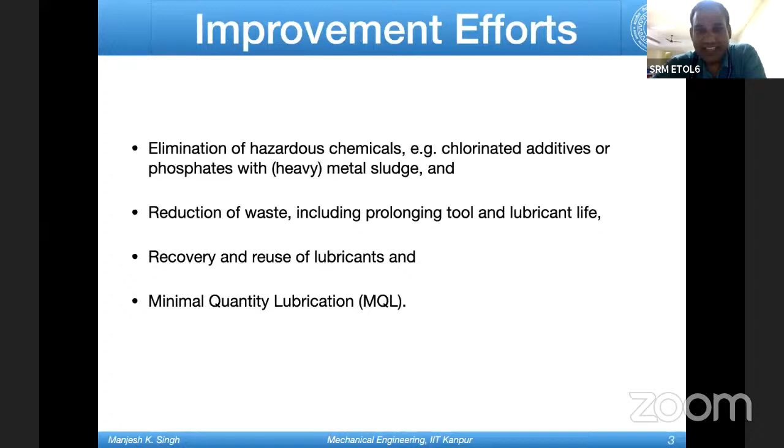If you want to check any video, you can just see. Yeah, it is working, video. I simply don't have video, I normally don't keep videos, but that's fine. It looks fine, no issue, it's working, so I'll stop sharing for now.

So, one thing - how are things? Fine, fine sir. Thank you so much for taking time out of your busy schedule to join us today and to deliver your wonderful talk. So we will start, sir. Yeah, I'll give the brief introduction and we can start.

Good morning everybody. We have our first speaker on day 2 of this 5-day international short-term course on tribology for sustainability. We have Dr. Manjesh Singh with us. It is my honor and privilege to introduce him to all of us. Dr. Manjesh K. Singh joined the Department of Mechanical Engineering, Indian Institute of Technology Kanpur on 16th September 2019, almost a year ago, as an assistant professor. His principal areas of research are tribology and rheology, mostly with polymers.

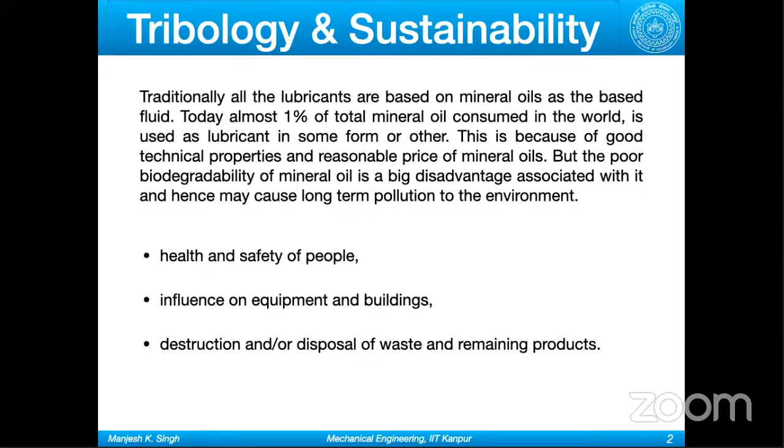So with this, I'll move to the next slide. As I said, the improvement efforts are primarily directed at elimination of dangerous chemicals, like chlorinated additives, phosphates with heavy metals, sludge, and all. Reduction of waste, including prolonging tool and lubricant life, recovery and reuse of lubricants, basically recycling, and then minimal quantity lubrications, where the idea is to put optimum quantity of lubricants required for the lubrication, no more or no extra, which will be disposed to the environment.

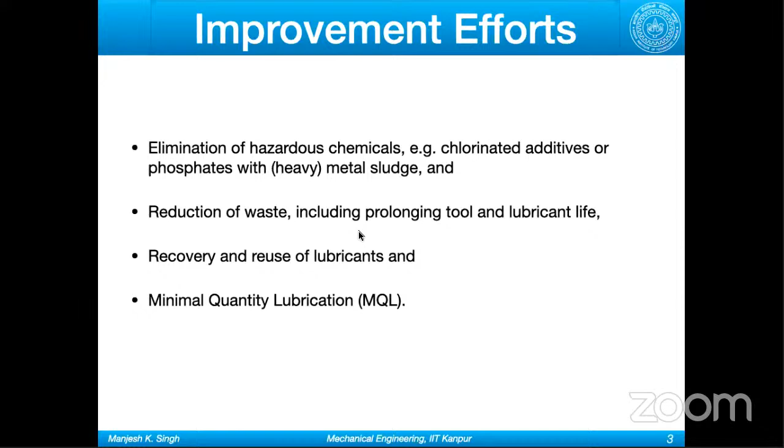And then my topic is aqueous lubricant. I would like to highlight water as a lubricant, and why we don't see water commonly used as lubricant. There are some properties of water which make it potentially a very good candidate for lubrication. It's readily available, non-toxic, environment friendly, and has high heat capacity, which gives it excellent heat transfer properties. At the same time, water has a very low boiling point, and whenever you have friction involved, you have very high heat generation, so the low boiling point of water is a disadvantage.

The biggest disadvantage with water is this low pressure viscosity index. Normally with oil lubrication, as you increase the pressure, the viscosity increases, which gives oil-based lubricants this load carrying capacity, which water doesn't have. If you have water in contact and you apply load, water will simply squeeze out because the viscosity doesn't increase as you increase the pressure.

But still, there are some specific fields where water is used as lubricant. One of the most prominent, which I would like to highlight, is the mining industry, because we want to avoid using oil as much as possible there, since there are very high chances of catching fires. So it's water which is primarily used for lubrication purpose there. I told you the limitations, but water has some attractive properties which we would like to exploit, though water on its own is not good for lubrication.

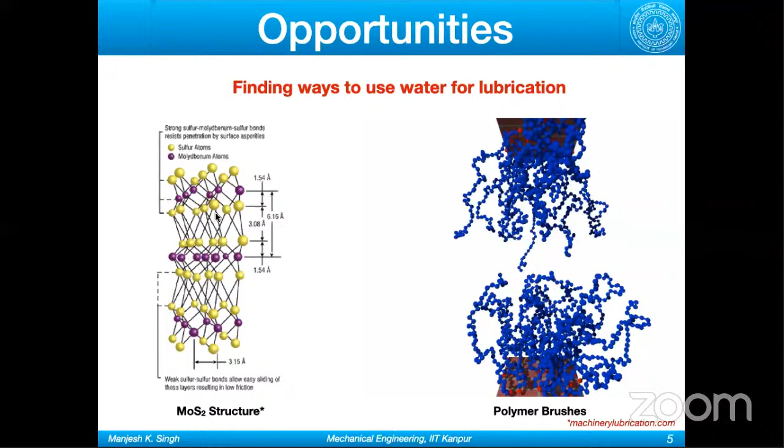All the lubrication in nature in our body is based on polymer brushes, and it's based primarily on this aqueous lubrication. With the help of water and polymer, we have lubrication. Polymer in the body means protein and all, glycoproteins and all. We have lubrication in the body. So I'll talk about these two topics in a bit of detail.

So I'll first start with this nanoparticle-based aqueous lubrication. The talk would have - I'll give, because it's a short-term course, it's not just a technical presentation - a brief introduction to emulsions and emulsifiers.

What are they? Oil in water emulsion, which is normally used in metalworking, and then the objective approach which I undertook during my master's thesis. And then why we want to use nanoparticles, then the experimental details, experiments which I did, the results, and then summary. I'll summarize this part of the talk and outlook.

As I mentioned, I will not have any simulation parts in this presentation. So emulsion and emulsifier, I'll start with this. Introduction - why we want to use this nanoparticle-based aqueous lubrication, or aqueous lubrication.

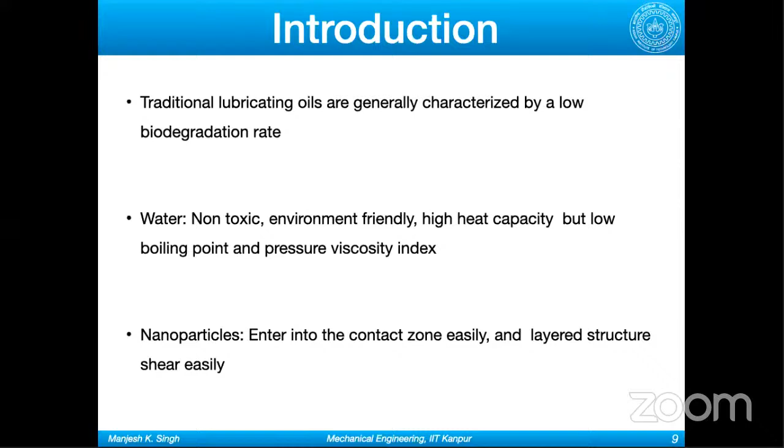As I mentioned before, traditional lubricating oils have a very low biodegradation rate. Water has some advantages which we want to exploit, and nanoparticles, because of their small sizes, can easily get into the contact zone, and because of their layer structure. So we cannot use just any random nanoparticles - it has to be nanoparticles with certain materials which have layered structures, which shear easily and give us low coefficient of friction. So what is emulsion?

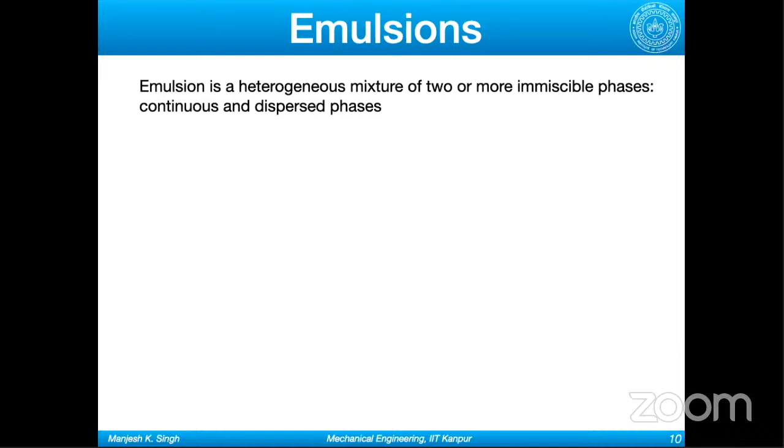Like if you do rolling and all, you'll see mostly this oil in water emulsion is used for lubrication, where roughly close to 90% or more is water, and then less than, I think close to 5%, even less, is oil, and the rest is all water. And I will tell you how it works when it comes to lubrication.

But what I want to do, or what the idea of my master's thesis was, that we wanted to replace this oil with nanoparticles. The water will be as it is there - we wanted to replace the oil with nanoparticles which have layered structures. So basically, we wanted to get rid of any oil in the metalworking lubrication.

So then emulsifier or surfactants - why do we need it? Generally emulsions are very unstable due to difference in the density of the dispersed and continuous phases. So you have water and oil, or nanoparticles and water, which have a density difference. If you use large particles, they will just sediment on the bottom of the surface. If you use very small particles, then because of their high surface area to volume ratio, and van der Waals attractions, they will come together and form clusters. So you will not have a very well dispersed emulsion.

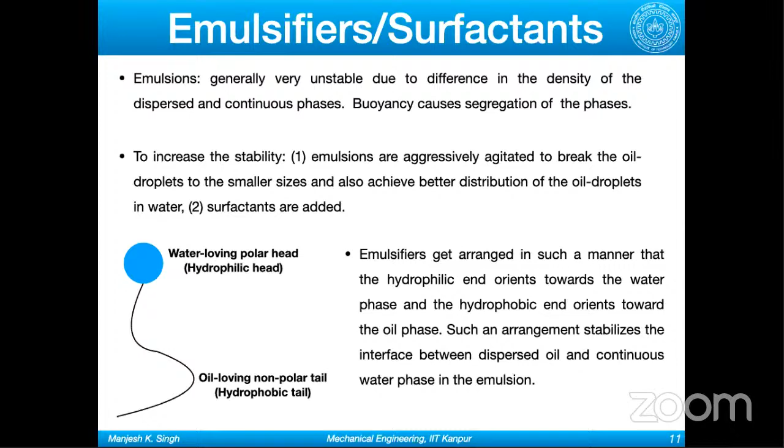So this way your water droplets will be stable in the continuous phase of water. Yes, oil droplets will be stable in continuous phase of water. So how, as I said, I will explain how this oil in water emulsion works.

As this emulsion is dragged into the contact zone, since water has very low pressure viscosity index, the water will simply squeeze out, and finally at the contact it changes from oil in water emulsion to water in oil emulsion, and when you reach the contact, you have only oil.

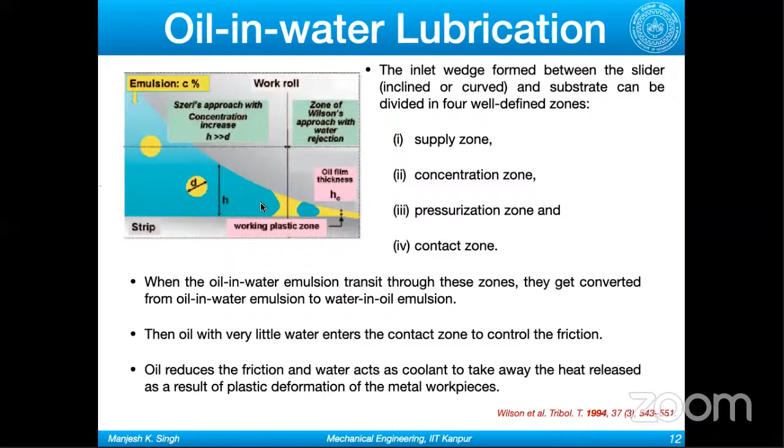So even in this case, it's only the oil which does the lubrication. What water does, because of its high heat capacity, is take away all the heat generated. So the combination works very well: oil takes care of the lubrication part, and water takes care of the coolant part. This is the idea of this oil in water emulsion mechanism.

So what we wanted to do is eliminate use of oil-based lubricant to improve carbon footprint, and achieve these goals by use of nanoparticle-based aqueous lubrication. Water does not provide elastohydrodynamic lubrication, as water has a poor pressure viscosity index, so it cannot support the rolling load. In case of rolling, we suspend inorganic nanoparticles in water to provide load bearing capacity.

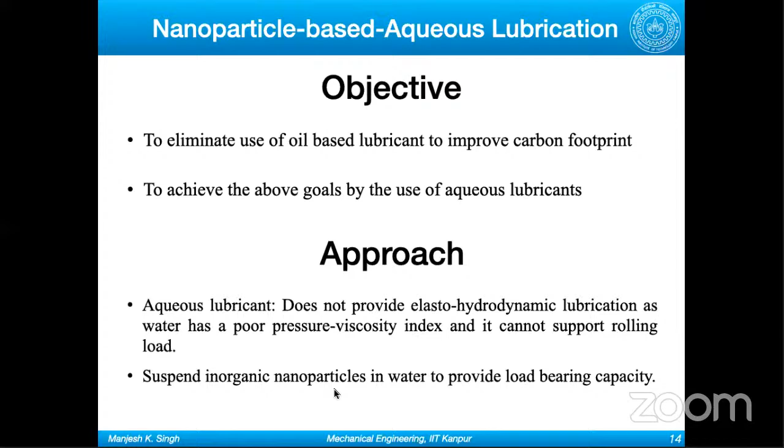So I'll now tell you a bit about nanoparticles. They have several advantages compared to organic molecules, which makes them a potentially good candidate to be used as an additive in the lubricant. Their nanometer size makes it possible for them to move into the contact zone without difficulty, just like oil moves into the contact zone easily.

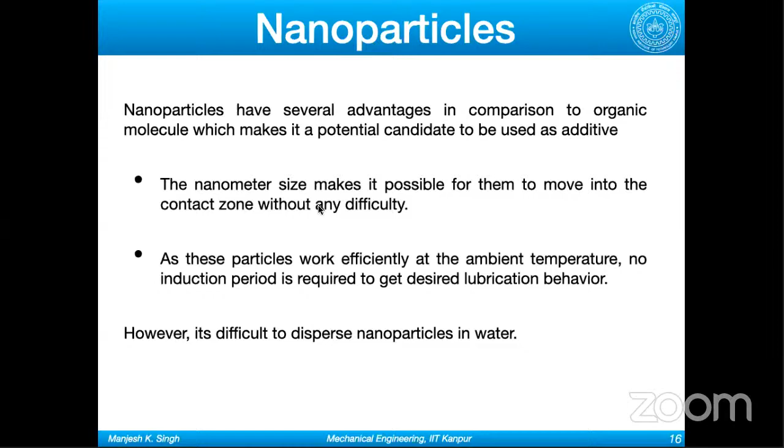The water will simply transport these nanoparticles into the contact zone, as it was doing before with the oil. These nanoparticles, because of their layered structure, can shear easily, which gives lower friction. These are some typical examples of nanoparticles used as lubricant, normally used as solid lubricant.

So all of these, like graphene, MoS2, WS2, or hBN nanosheets, have a layered structure. Within the layer, they have covalent bonds, and between the layers, they have weak van der Waals interactions. When you apply normal load, because of the covalent bonds, they can support the normal load, but because the interlayer binding is very weak due to van der Waals interaction, when you apply shear, they easily shear. That's why you have very low friction.

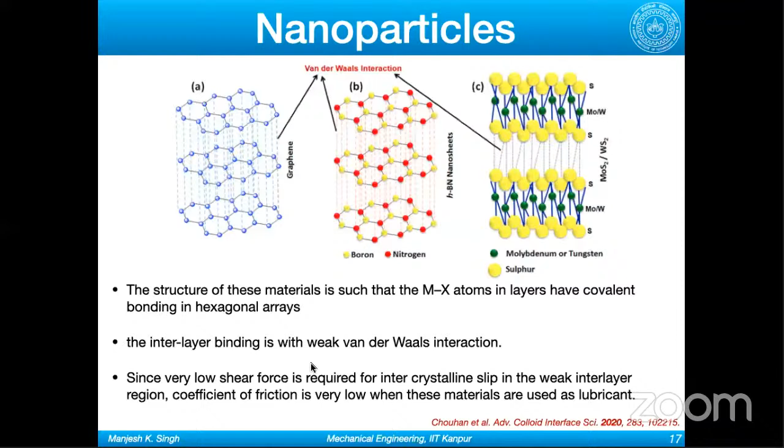So the idea was that we just replace oil with these nanoparticles which can shear easily, and they will give us low friction, or low coefficient of friction, so to say.

For the experiments, I tried different nanoparticles: MoS2, Kaolin, and Nanoclay nanoparticles. The surfactant I used was sodium dodecyl sulfate, more commonly known as SDS. These are the details of the concentration of particles used.

To prepare the mixture, we sonicated it for 2 minutes using ultrasonic. I didn't mix all the particles together; in one case just particle plus water, in another case particle plus water plus surfactant, then we ultrasonicated for two minutes. Then we did the DLS experiment to get the particle size and zeta potential.

Thereafter, we did ball on disk tribometer experiments at various speeds and loads for different nanoparticles suspended in water. The material used in the experiment was bearing steel, EN31, of diameter 6 mm, used as the ball in the ball on disk tribometer experiments. The disc was stainless steel, SS304, which was used as a substrate for the experiment.

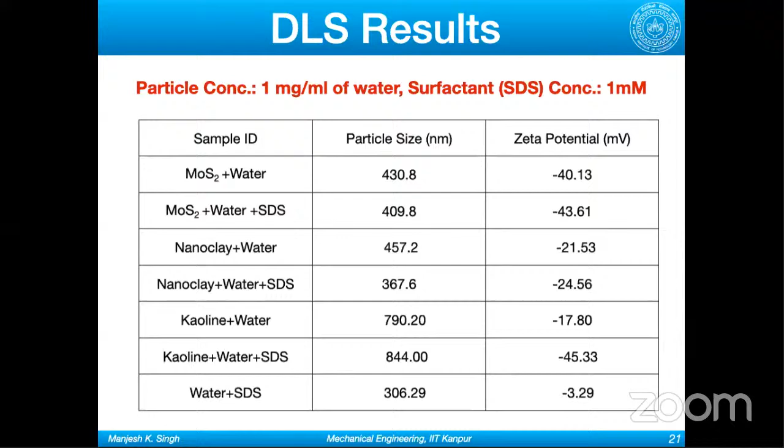We also tried just water plus SDS. I'll tell you the reason later why we did this particular experiment, so I'll not focus on it now. If you are interested, you can ask me later about this part.

So I'll just go into the tribological results, or friction results. First we started with the dry contact. On the left side you always have friction coefficient against speed at a constant load of 800 megapascal. When I say 800 megapascal, I've calculated this contact, the Hertzian contact pressure, because I know the materials in contact and the geometry.

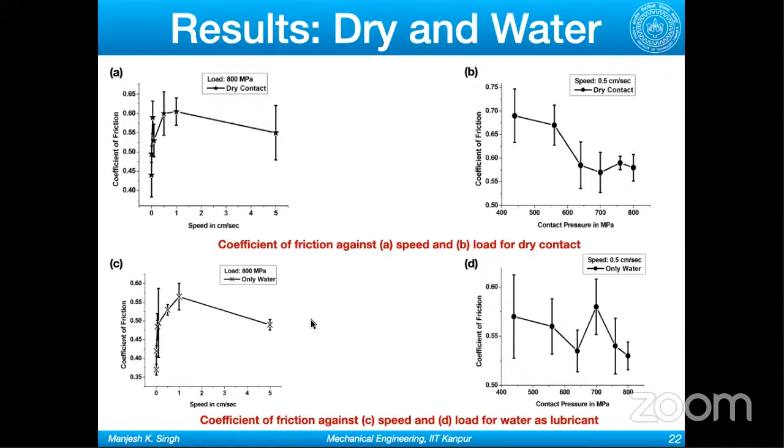So whenever I say the load in this part of the talk, it's basically Hertzian contact pressure. In dry contact, both against speed and against load at constant speed, we see a pretty high friction value, which is expected. When I did it in just pure water, we also get similar friction. As we know, water cannot help reduce friction because it cannot support normal load - it will just squeeze out, and you again have metal contact, or alloy contact, or hard surface contact.

When we add this surfactant, we see higher friction. But when we plot it against contact pressure, or against load, the friction values are close, though the trend shows a switch. So what we can basically say is that when we add just nanoparticles to water, our friction already goes down to a very low value, similar to what we got with oil lubrication. So we are getting rid of oil and still getting the same coefficient of friction.

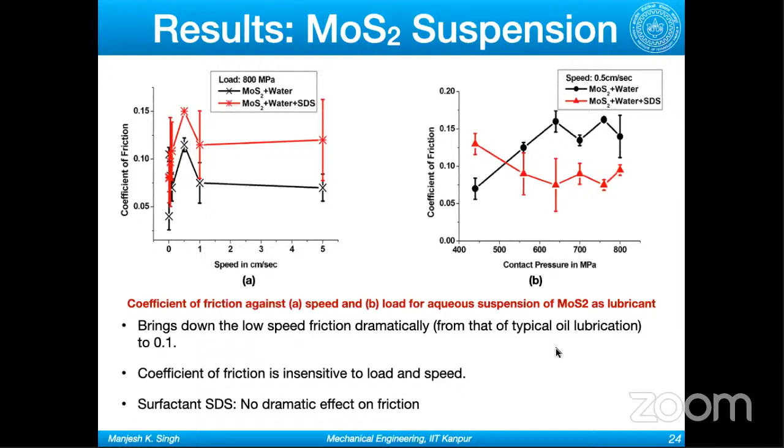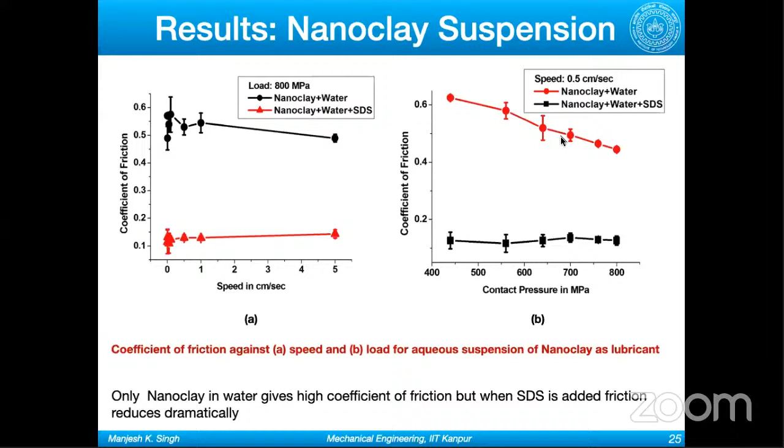That made us interested in the effect of SDS, or sodium dodecyl sulfate - what does it do? To check that, we did one experiment with just sodium dodecyl sulfate and water, surfactant and water, and we also saw very low friction. I'll go back to these results again later. So what we can say is in the case of MoS2 plus water only, we are getting low friction.

But with nanoclay plus water, we were not getting good, low friction - we were getting rather high friction. But when we added SDS plus water, we got low friction. So it could be that nanoclay is doing nothing - it's just the SDS which is forming a monolayer on the surface, and it is reducing friction in the case of the nanoclay plus SDS mixture, or suspension, in water.

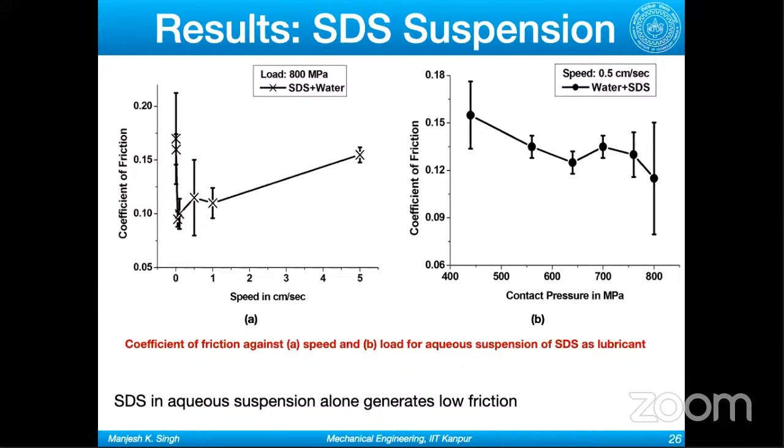But in case of MoS2, we got low friction without the surfactant. So with this, I'll compare the results. What we can see is that in all the cases, MoS2 plus water without any surfactant gives us low friction, even lower than water, even lower than oil. So it is a good candidate.

The other two candidates, nanoclay and kaolin, didn't perform as good or as expected. But when we added the SDS, the performance improved there too, but we are not sure exactly if it is because of kaolin or nanoclay or just because of SDS. We can certainly conclude that MoS2 plus water gives us coefficient of friction comparable or even lower than

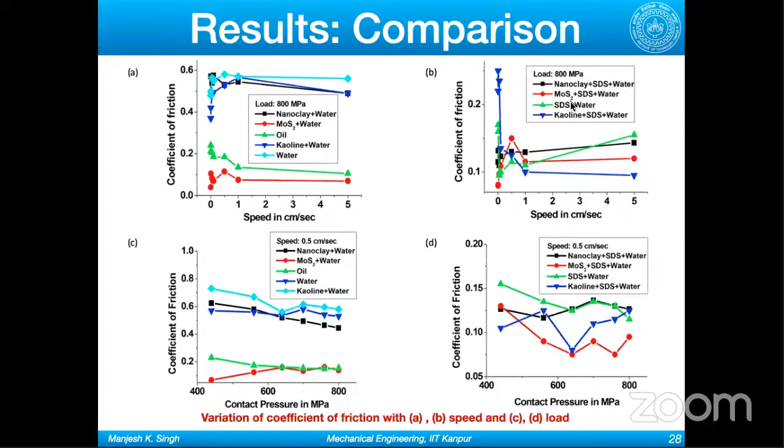with just oil for lubrication. So this could be one possibility. I'm not saying that you should right away use it, but what I'm saying is that we need to probe it further. It seems to be a good candidate to replace oil in water emulsions for lubrication in metalworking.

To summarize, the nanoparticle-based aqueous lubricants can bear high contact pressure of all the particles studied. MoS2-based aqueous lubrication gives the best results, and SDS in aqueous suspension alone also generates low friction. The reason for this behavior of SDS is not understood and requires further investigation.

This work I did in 2010-11 during my master's, and after that I could never go back, because in my PhD and postdoc I was working with different things. So if you guys are interested, you are most welcome to look into these things in detail.

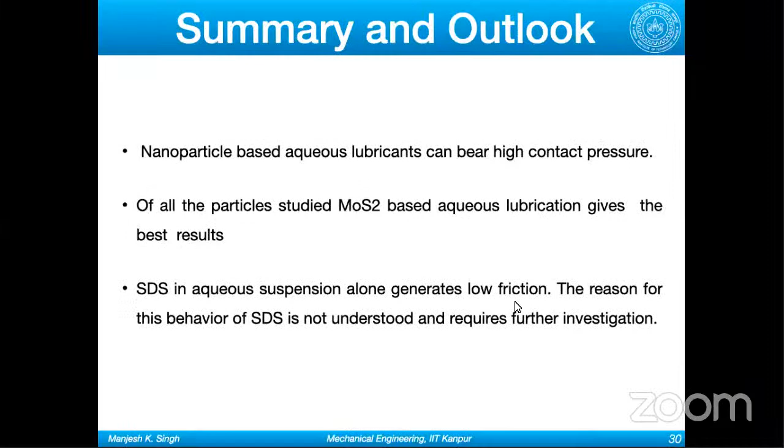With this, I'll move to the next part of my talk, which is polymer-brush-based lubrication. Here again, I will talk only about my experimental work, no simulation works. I'll take you to the introduction, what is polymer brush.

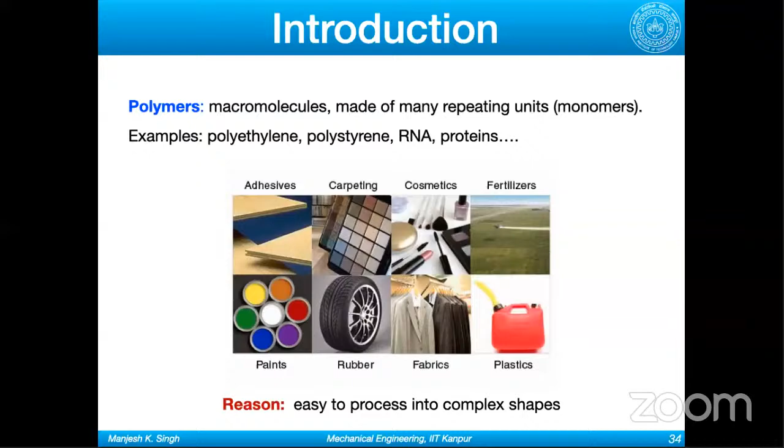As I said, we see it all around us. The reason is that polymers are very easy to process into complex shapes, and that's why it's being exploited too much as well, and it is becoming harmful, to our disadvantage, and we're trying to limit its use in our day-to-day life as much as possible.

And then if you are in a good solvent, what do you mean by good solvent? Good solvent for a polymer is a solvent which the polymer likes, so it would like itself to be surrounded by this solvent. That's why it opens up and is surrounded by the solvent, so the contact surface area with the solvent is more.

But when you have a poor solvent, that means the polymer doesn't like the solvent, or rather you can say hate—maybe hate is too strong a word—it will avoid any contact with the solvent as much as possible. So it will collapse in the form of a sphere or a globule to minimize its contact with the solvent. Whenever you say a poor solvent, you'll basically see the polymers collapse.

And how do you see, physically, if you want to check whether a solvent is a good solvent or bad solvent for a polymer? You just add the polymer to the solvent. If you can see through, if the mixture is still transparent, that means it's a good solvent because the polymer is happily opened up.

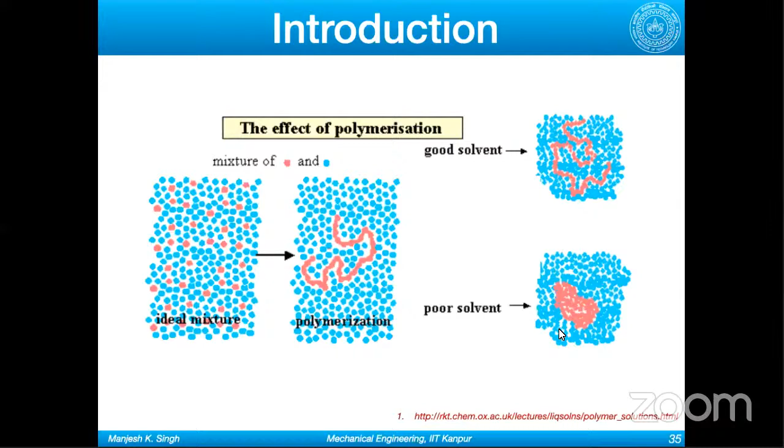But if it's a bad solvent, the polymers will collapse and you will see turbidity, so the mixture will not be transparent. So at once you can say that it's a poor solvent for that particular polymer. Why I told you this, because I will be using this term good solvent or poor solvent in my talk today.

So what is polymer brushes? If you have polymers in a good solvent and you graft or fix one end such that the distance between two neighboring grafting sites is much higher than the radius of gyration of the individual chain, they'll form a mushroom-like structure. If you move them closer, so the distance is of the order of the radius of gyration, they'll be like semi-stretched. If you bring them further closer, so the distance between two neighboring sites is much lower than the radius of gyration, they'll stretch out to form a brush-like structure because of entropic and excluded volume effects.

If you repeat the same sequence in a poor solvent, when they are far apart, they will form a pancake-like structure. If you bring them closer, they will form kind of a cluster. And if you bring them further closer, they'll form a homogeneous layer on the surface. They will not stretch out in a poor or bad solvent to form a brush-like structure.

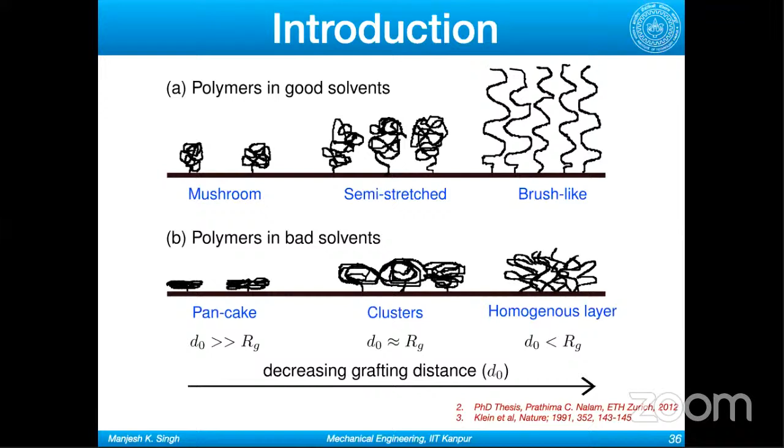So there are primarily two methods to prepare polymer brushes. One is grafting-to, where you have polymer chains already in a solution. You pour it on the surface, like we used to do on the silica surface, and because of electrostatic interaction, it will get attached from the functionalized group to the surface and form a brush-like structure.

The advantage here is the self-healing effect. Suppose you are rubbing your polymer-grafted surface against something, and some polymer chains wear out. If you prepared your polymer brush using the grafting-to approach, there are other polymers in the solution freely roaming around, and they will come and replace it. So it has a self-healing effect. But the limitation is that you cannot achieve a very high grafting density, because if polymer chains are already occupying a spot, they will not let other polymer chains enter in between.

The other approach is grafting-from, where you first attach the initiator to the surface and then you grow polymer chains out of it. Here you get very high grafting density, but you don't have the self-healing effect. So both approaches have their own advantages.

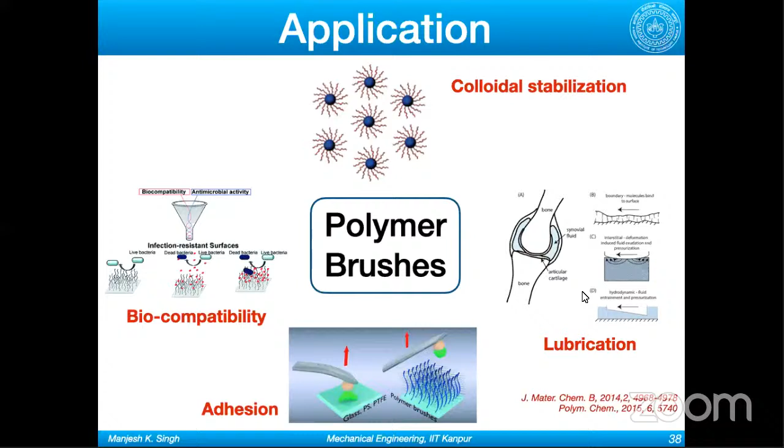The other part where I will focus, or my work is, as I was saying, all the lubrication in nature is based on this polymer brush in our joints, in all the joints, or in any living thing. This lubrication is basically based on polymer brushes. Just to give you a simple example, you have these surfaces and glycoproteins attached to the surface, and as I said, they form a polymer brush-like structure. And then you have this synovium or synovial fluid, as they say. I am not very used to these biological terms.

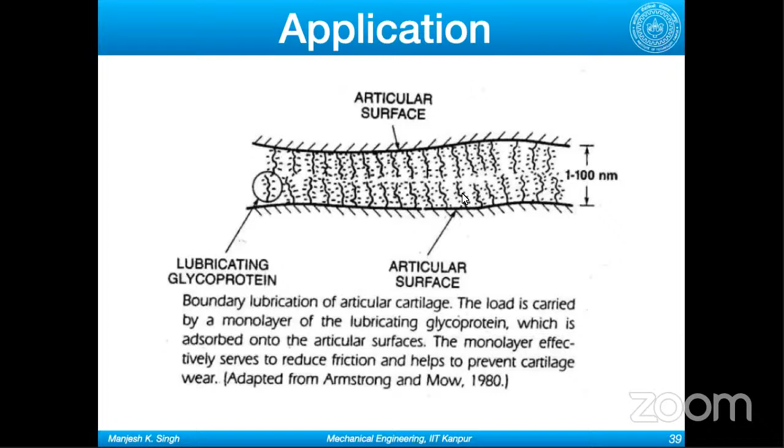So synovial fluid, which is in between, is more like water or any solvent that the polymer, in this case glycoprotein, likes, will be in between. These polymers will take care of load carrying capacity, and this solvent in between, because of its low viscosity, will give you lower friction.

What happens is that your polymer chains, grafted on the surface, because of excluded volume effect or entropic reasons, don't want to interdigitate.

So what exactly happens is that polymer brushes, because of strong interchain repulsive force, prevent interdigitation, and a thin fluid film supports the normal load between opposing brushes or brush and counter surface. This thin film of fluid in between takes care of lubrication, or it assists in reducing the friction at the interface.

So if you have a hydrophilic polymer for which water is a good solvent, and you use water with this polymer, the polymer will take care of the load carrying capacity, and the water, because of its very low viscosity, will reduce the friction. If you have a brush against brush system, the friction will be too low to measure with most of the experimental tools available today.

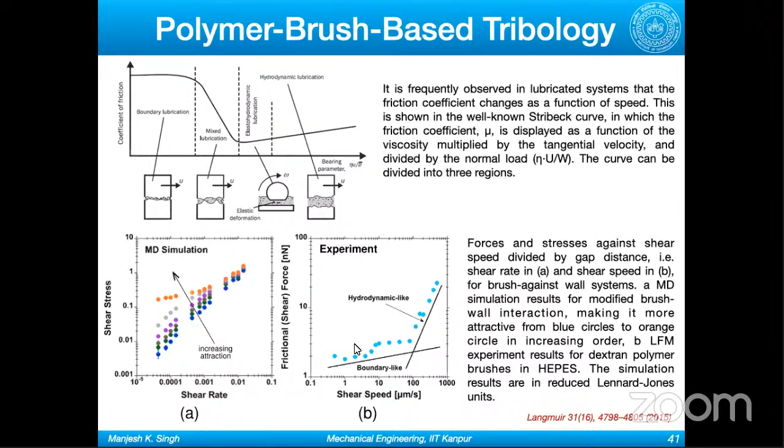But if you look at this polymer brush-based lubrication, these are my simulation results and these are experimental results from one of my colleagues. You see a hydrodynamic lubrication regime, a mixed lubrication regime, and a boundary or boundary-like regime, but you don't have any mixed lubrication in between—you just go from boundary to hydrodynamic directly, which makes it very interesting. This is just to give you information; if you are interested, you can read more about it.

So I will now show you the effect of cross-linking. What happens if you increase the cross-linking on the tribological behavior of polymer brushes? So what do I mean by cross-linking?

As I told you, we grow polymers out of the surface to form polymer brushes. We can also cross-link this chain. The reason people normally cross-link the polymers is to increase the modulus. Normally the polymer and solvent alone will have very low modulus, so they will wear off easily. But if you do the cross-linking, you can improve the modulus or stiffness, and so reduce the wear.

So you have to have a combination, kind of brush and gel, and you have to have optimum cross-linking so that you have low friction and low wear as well, because if you have a lot of cross-linking, as we will see, the friction will go up.

There are two methods to create these cross-linked polymer brushes, also known as polymer gels. One is the initiator modified substrate, or in situ method, where while you're growing the polymer chains out of the initiator, you cross-link them. The other is post-processing, or ex situ, where you first grow the polymer chains with functionalized monomers or ends, which after growing the polymer brushes you functionalize to react and form the polymer gels.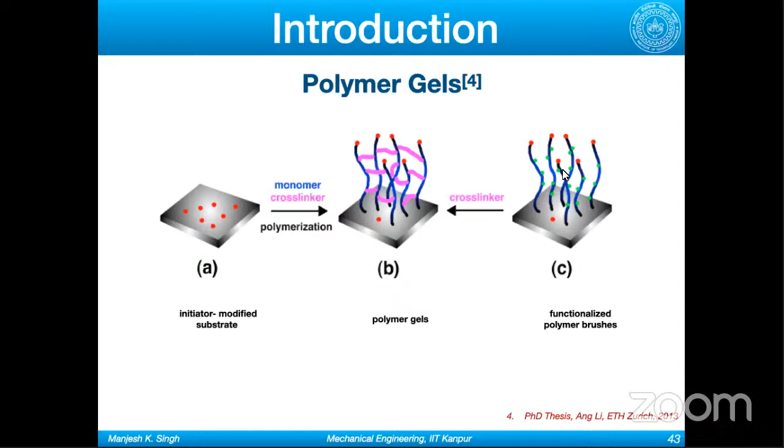I did the testing with AFM and the simulations, but I am not an expert to prepare these polymer brushes or gels, because I'm not a chemist and not good with chemistry. So what was the objective of this study?

To model polymer brushes using coarse-grained molecular dynamics technique, to characterize the tribological behavior of various polymer brush systems using colloidal probe-based lateral force microscopy, and to elucidate the molecular design of brush systems. If you want a certain kind of lubrication, what parameters you need to control and how much. So basically it gives you a design rule for designing polymer brushes with the optimum or required lubrication properties, using a feedback loop between experiments and simulation.

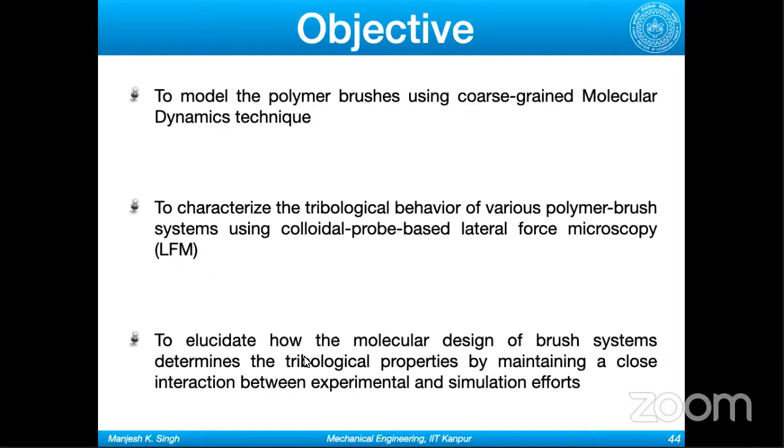Here I will show you only the experimental part of my work. So the material first: we had PGMA, polyglycidyl methacrylate brushes and gels. The solvent we used was DMF, which is a good solvent for PGMA brushes and gels.

So as I was saying, we use AFM-based colloidal probe lateral force microscopy. Normally we use AFM to get the topography of the surface by tapping mode or other modes, because when you do the rastering of the surface, because of the surface profile, your cantilever will move up and down, and you can get the profile of the surface.

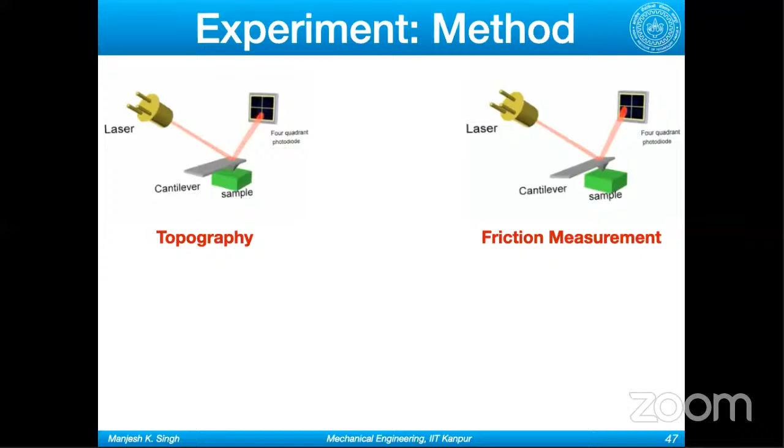But you can also measure friction using AFM. What you do is you have four diode quadrants. So when you apply lateral motion to your cantilever, it will face the lateral force, so it will twist and move on the diode in the XY direction. And if you calibrate your cantilever in the lateral direction for lateral stiffness and sensitivity, you can measure the lateral force or friction force.

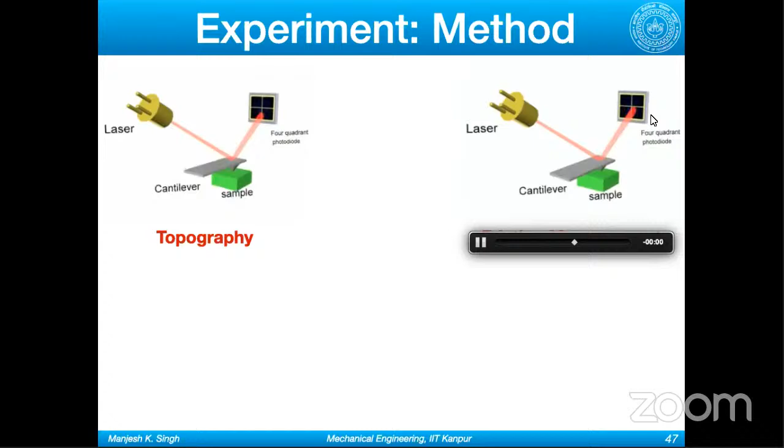You know what force you're applying because you know what voltage you applied. So you know the normal force, you know the friction force, and you can get the coefficient of friction from there. So as I said, we use colloidal probe lateral force microscopy.

I didn't use a sharp tip cantilever, because we are using polymers in our experiment. If you go with a very sharp tip of silicon carbide or something, it will simply scratch off your polymers, so you will not get to study what you want to see.

So what we do is buy tipless cantilevers. We attach a colloidal sphere, silica colloidal spheres, on this tipless cantilever. Now we don't have a very sharp tip, and we have a well-defined geometry—a sphere. We have a higher contact area because we are using a sphere, so the contact pressure goes down.

This also helps us, if you want to deduce the contact pressure or contact mechanics, you can do it because you have a well-controlled geometry, or a geometry which you know.

In AFM, normally you have a trace and a retrace curve, and you take the average of these two curves to get the friction force. So this is the trace curve, this is the retrace curve. You do this minus this, divided by two—you can take the modulus value of each, or just subtract one from the other and divide by two. You will have a friction force. You have applied the normal force or voltage, you know the sensitivity and stiffness, so you know the normal force and the friction force, so you can get the coefficient of friction.

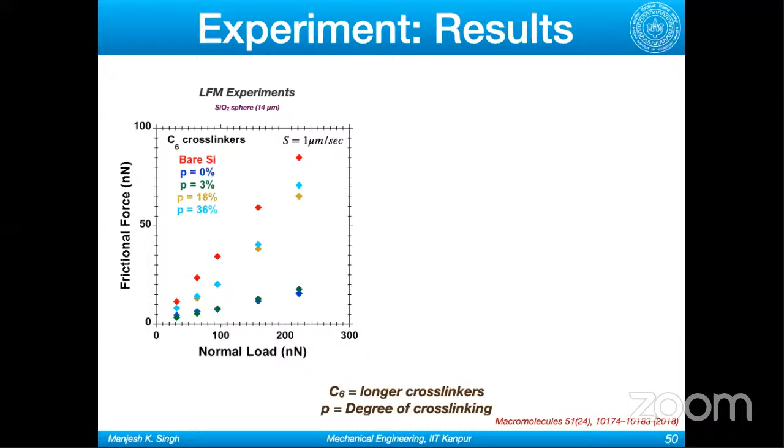We repeated the same experiment for C6, the longer cross-linkers, and we have a similar trend here as well. I'll just quickly move to the coefficient of friction part.

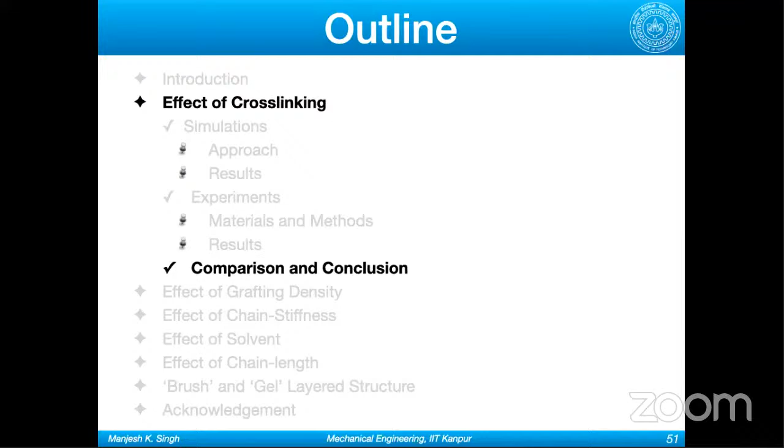So here I've shown only the simulation results - I haven't told you the simulation details, what all I did there. What we can clearly tell from this is that as you increase the degree of cross-linking, your coefficient of friction goes up, both in simulation and experiments. But as you increase the length of the cross-linker, your coefficient of friction goes down.

In simulation, this was very clear and consistent. But in experiments, the effect of cross-linker length at lower degrees of cross-linking is not very clear. Don't compare these coefficient of friction numbers on both sides, because the idea was not a quantitative comparison - I was doing the simulation in reduced units, so it wasn't all-atom simulation, more on the physics side. We're basically comparing the qualitative trends seen in simulation and experiments.

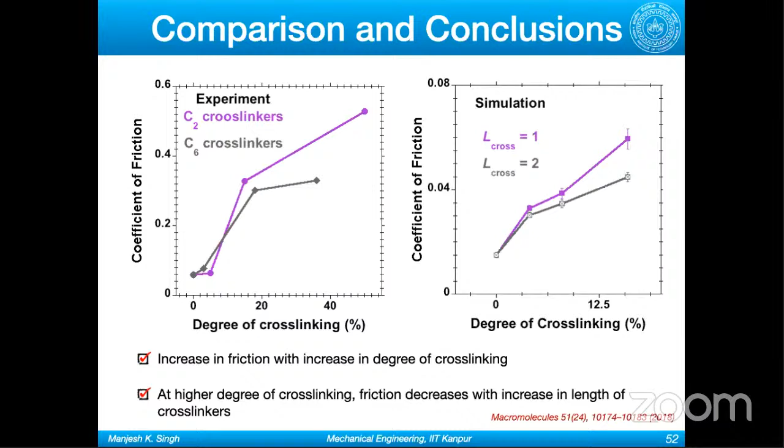With this, I'll move to the effect of grafting density - I think my time is also closing. As I said, there are different parameters which affect polymer-brush-based lubrication.

If you have very low grafting density, there are fewer polymers to support the normal load, so the solvent will squeeze out. If you have high grafting density, they can support the normal load, and the solvent in between can help reduce friction. So as expected, if you increase the grafting density, the coefficient of friction will gradually go down.

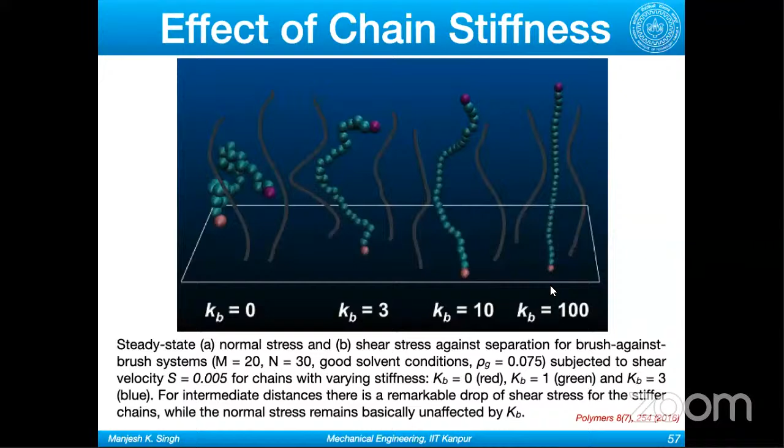Then we move to the effect of chain stiffness. What do I mean by chain stiffness? In simulations, we take KB as the bending rigidity or bending coefficient. As you increase the bending coefficient, the polymer chains become more and more stiff - that's what I mean by chain stiffness.

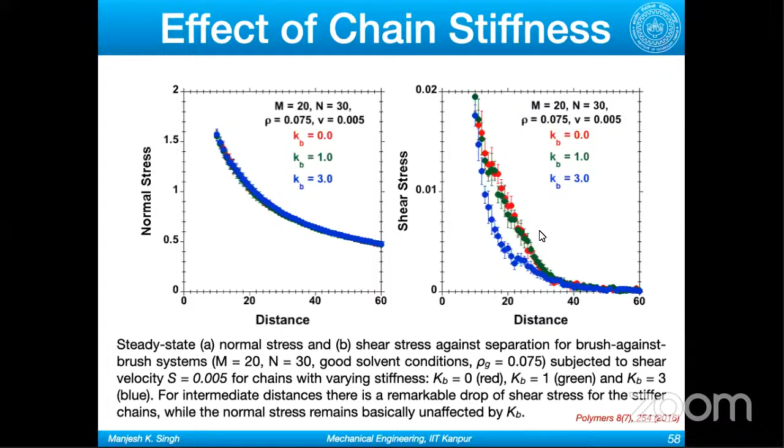So here also we saw that as we increase the chain stiffness, there's no effect on the normal stress, but the shear stress is decreasing as we increase the stiffness. Basically what happens is that as you increase the chain stiffness, your friction goes down.

Then effect of solvent. Polymers have this good solvent, bad solvent behavior - very interesting material. They also have something called co-solvency. What is co-solvency? Suppose there are two solvents which are individually a bad solvent for the polymer. But when you mix them at a certain mixing ratio, they behave as if together they are a good solvent. So we call it co-solvency.

Then there's co-non-solvency behavior as well, where two good solvents for the polymer, individually good, but when mixed together at a certain ratio, behave as if they're a bad solvent. The polymer will collapse and will not form a brush-like structure. So we can exploit this to design smart lubricants.

So what do I mean by collapse or swollen? The top one is what we call co-solvency. On both sides you have poor solvent. This curve tells you the swelling or thickness of polymer brushes - with both sides pure bad solvent, you have a collapsed state, but as you mix them at a certain ratio, they swell and form a brush-like structure.

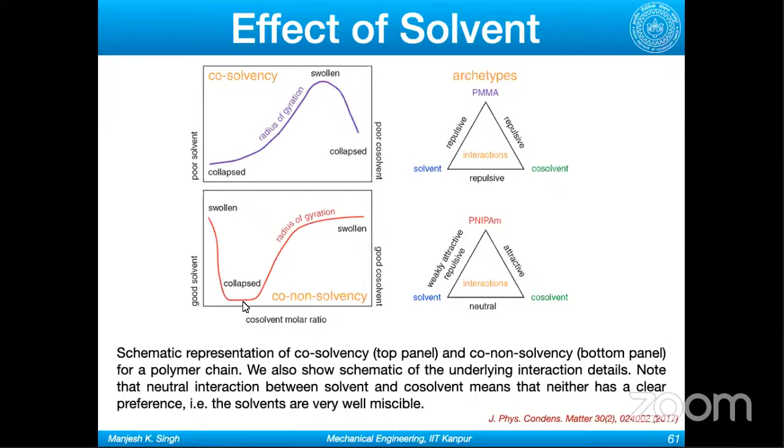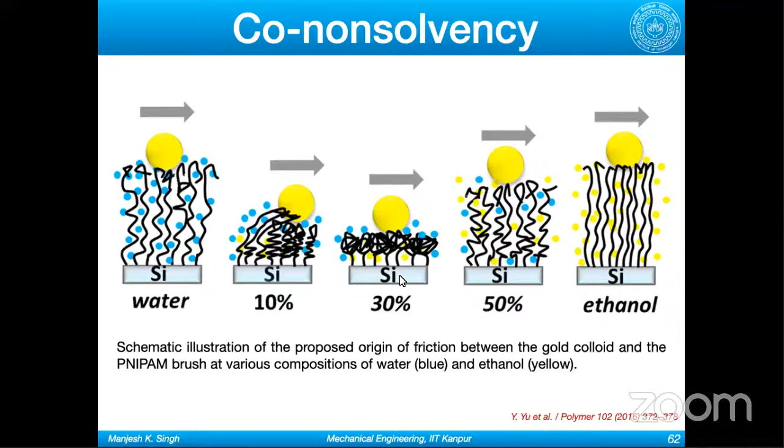People have studied this - you can have a water-ethanol mixture, like for the PNIPAM. In pure water, polymers are stretched out forming brush-like structure. In pure ethanol also they form brush-like structure, so you have low friction. But at 30% mixture, they're in a collapsed state, so you'll have higher friction, which you can see from this force and separation curve. At 30%, the trace and retrace curve gap is very high, indicating high friction force. But in pure water and pure ethanol, this trace-retrace curve is quite close, so you have low friction.

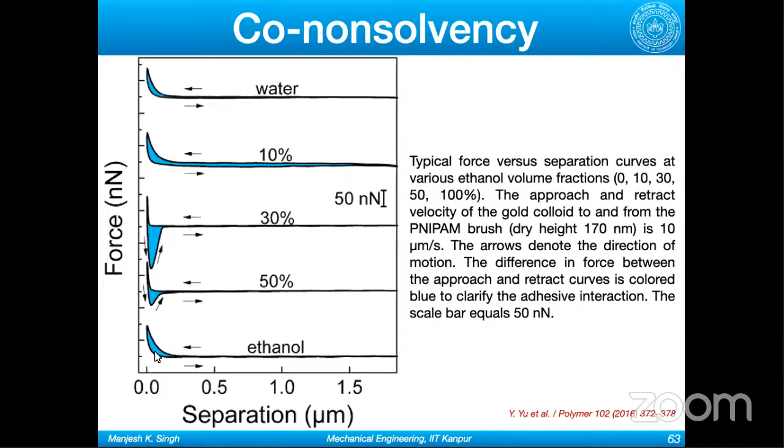With this, I'll move to effect of chain length, which is not very clear. These are my experiments - bare silicon gives very high friction. As soon as you graft polymer chains on the surfaces, the friction goes down. But there are two curves - in this plot on the left side you cannot see it, but on the right side you can see it when I zoom in.

We don't have any clear understanding of what happens with the length - initially, chain length of polymer chains, not crosslinkers, since we don't have crosslinkers there. With the length of polymer chains, initially we see lower chain length gives higher friction, then the higher one gives lower friction. This is something I don't understand, and nobody understands - it hasn't been studied theoretically yet. So we don't know this part.

We repeated this experiment with another colloidal probe of polyethylene. Still, we don't have consistent results. So what I would like to say is that the effect of chain length is still not understood. If you're interested, you can research in this direction - you can have a project or work in this direction.

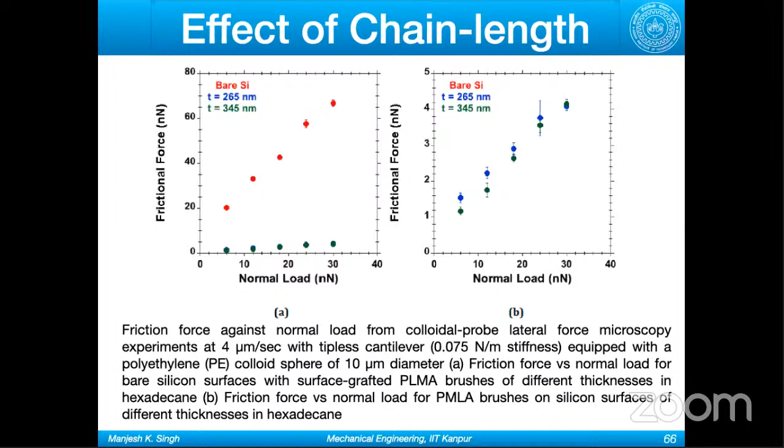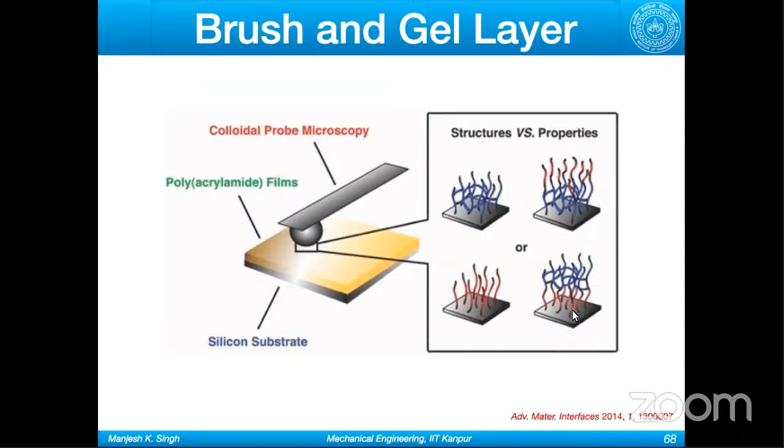It's an open problem. Then there are brush and gel structures. As I was saying, gels are stiffer with higher modulus, so they give lower wear, but polymer brushes give lower friction. So you can have the best of both worlds - gels on the bottom and brushes on top. You will have lesser wear, and because the top layer has brushes, you have lower friction. These are my simulation results again.

I'm sorry, I have to move quickly since my time is closing. In short, if you have brush on top of gel, it will give lower friction and perhaps improve wear behavior as well, though I have not studied the wear properties. With this, I'll summarize that the tribological behavior of polymer brush can be tuned by controlling different parameters.

It can be concluded that thickness of polymer brushes is the most important factor in deciding frictional behavior. Polymer brushes can be designed to achieve specific tribological properties for application in biotribology, mostly in implants where we use this kind of lubrication, or in contact lenses. Contact lens is the perfect example of polymer gel-based lubrication—your contact lens is nothing but a polymer gel.

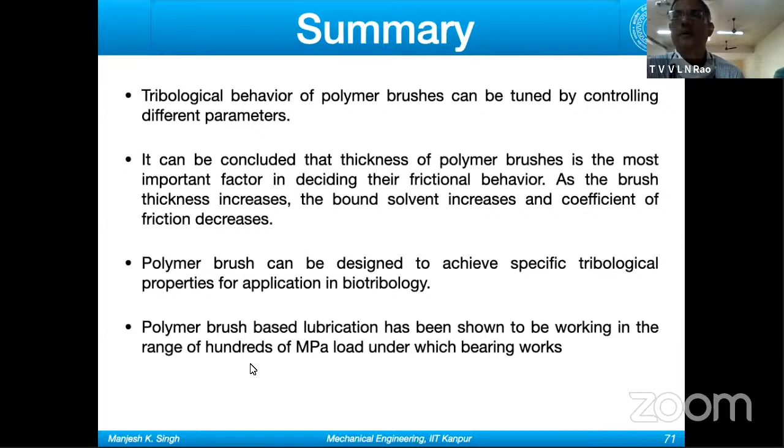Polymer-based lubrication has been shown to work in the range of hundreds of megapascals. So people are studying if we can use this kind of lubrication, with water and a hydrophilic polymer, in metalworking and similar applications, so we can get rid of any oil in our system.

Synthesizing stratified layers of brush-gel or gel-brush structure by controlling cross-linking can lead to specific mechanical and tribological behavior. I'm sorry for overshooting my time.

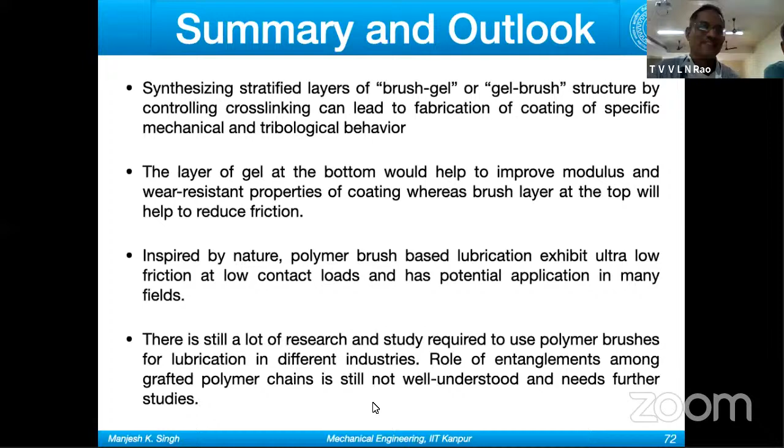There's still a lot of research required to use polymer brushes for lubrication in different industries. The role of entanglements among grafted polymer chains is still not well understood and needs further study. This is something I'm planning to work on now with IIT Kanpur.

With this I'll summarize. If you're interested in the second part of the talk in more detail, you can refer to this book, where our Professor Katiyar is one of the editors. I have a chapter there on polymer-brush-based tribology, you can have a look there. With this, I'll thank you all, and if you have any questions, I'm happy to answer.

Anybody? Thank you, sir. Okay. Thank you, Manjesh. Yeah, just a minute. We have several questions.

Okay, so if you can ask me, I'll try to answer. One question asked by Pawan Soni: he wants to ask about how, as normal load increases, coefficient of friction should increase, but here it is reducing. In which case? In the first part of your presentation, you showed that when increasing the load, coefficient of friction reduces, but he thinks it should go the other way—when increasing the load, coefficient of friction should increase. What is the basic reason for this decrease? Why do you think increasing load will always lead to an increase in friction? I'll tell you why.

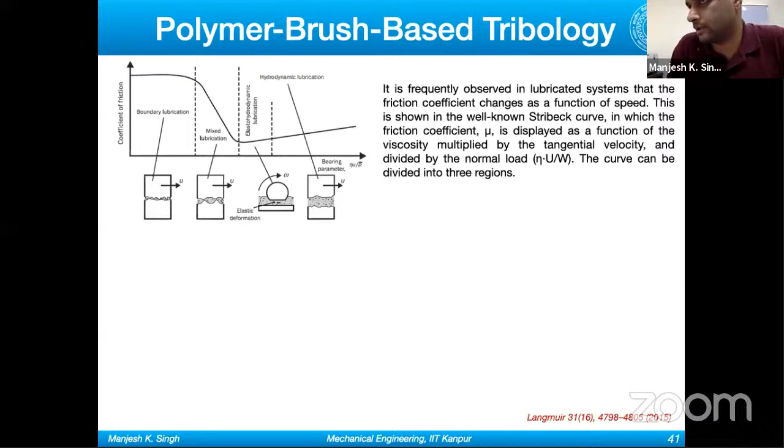My question is, can we apply polymer brush lubrication to surfaces which facilitate chip flow in machining, like flutes or rake surfaces? No, as I said, polymer brush-based lubrication has mostly been used for soft surface lubrication, like in our body. In the group where I did my PhD, Professor Spencer's group, there was one attempt where somebody tried it on a steel surface, but she was not very successful. However, there are other studies, as I mentioned towards my conclusion, where people have reached hundreds of megapascals of load, like 600 or 800 megapascals, the kind of load you have in metal working or chip cutting. So yes, it can be used, but it's still not there. I don't know of anywhere people are using it currently. It's still mostly used for soft surface lubrication, but it's true that people are studying it.

Last question, from Manjesh: Srinivas again asked whether water and MoS2 will mix to form a stable emulsion without addition of SDS. That's what we saw. I don't know exactly how stable it is, but from the zeta potential it was looking quite stable. The numbers were close with or without SDS, but in terms of friction, it was much better without SDS.

So that's from my study. My study was only for 1 year, so it can be. I think without addition of SDS, it will also maybe be stable for 24 hours, 48 hours, like that, but maybe not for 1 month.

I have used only one particular surfactant because of limitation of time, and I had another FEM simulation to take care of during my master thesis. Half of the part was FEM simulation of the cold rolling process, but there are other surfactants like CTAB and others. We studied only one particular surfactant, so we can explore other surfactants and see how they affect the friction behavior. In my study, I focused on only one surfactant.

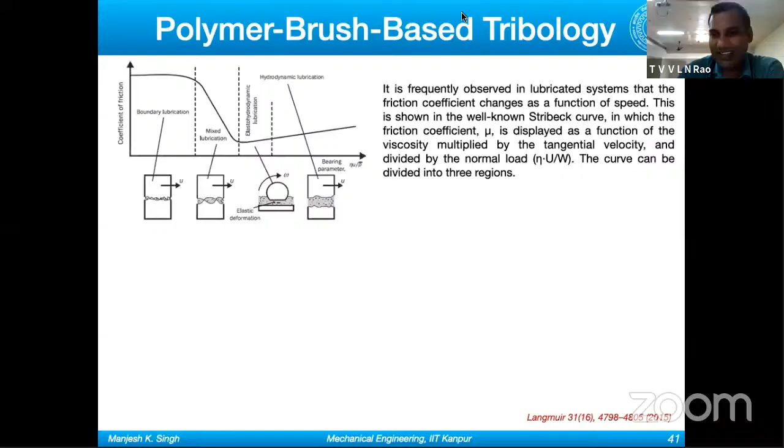Okay, thank you very much, Manjesh, for again such a nice presentation. Everybody appreciated your presentation, it was good. The next speaker is also waiting, next talk from Indonesia. If you are free, please join that talk also. I will try, but I have a meeting to catch up, so I'll just rush out. Okay, okay, nice, thanks a lot. Okay, thank you.

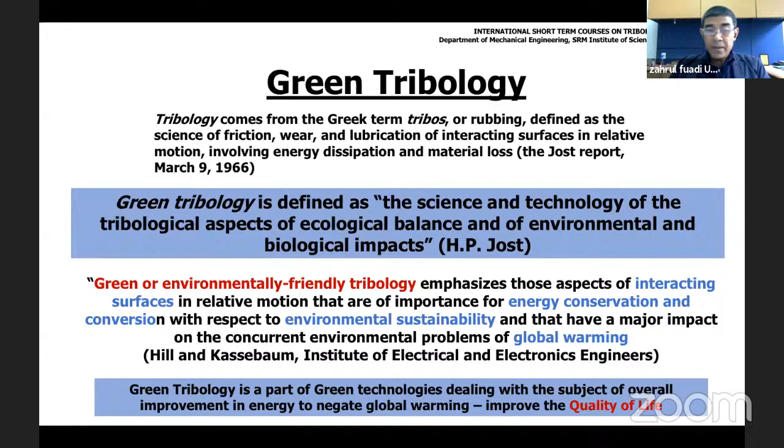To achieve tribological research that improves energy efficiency, we should achieve reduction of material and energy loss due to wear, reduction of energy loss due to friction, and conservation of energy and non-renewable resources by extending the life cycle of components, and reduction or elimination of lubricants through proper selection of low friction mating surfaces. There are three steps to identify typical tribology energy sinks in industry: reduction of tribological losses in major sinks such as utilities and transportation, and exploitation of the energy conservation potential of new surface modification.

Let's talk about application. We have gas fuel cars, and now with technological development, we have hybrid cars, which are fueled by gas and electricity. And then we have Tesla cars, which fully use electricity. So we have some energy conservation here.

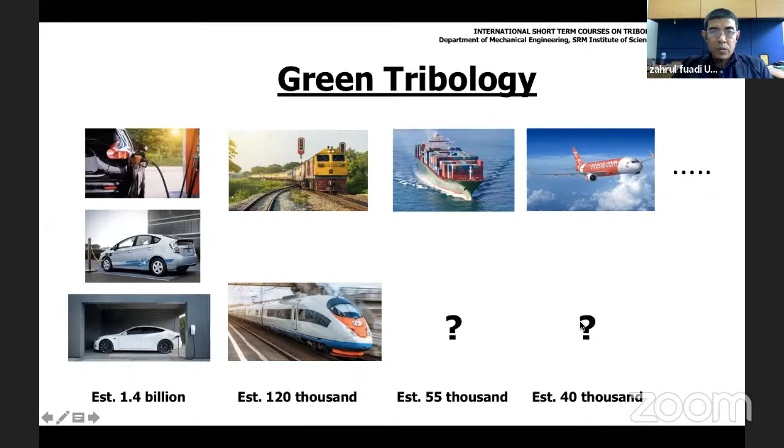In the future, we have to think about producing more electricity from renewable resources, so that the electricity we use for electric cars, electric trains, or other applications does not come from burning fossil fuels. Then we have a sustainable world, energy reduction, and a better environment.

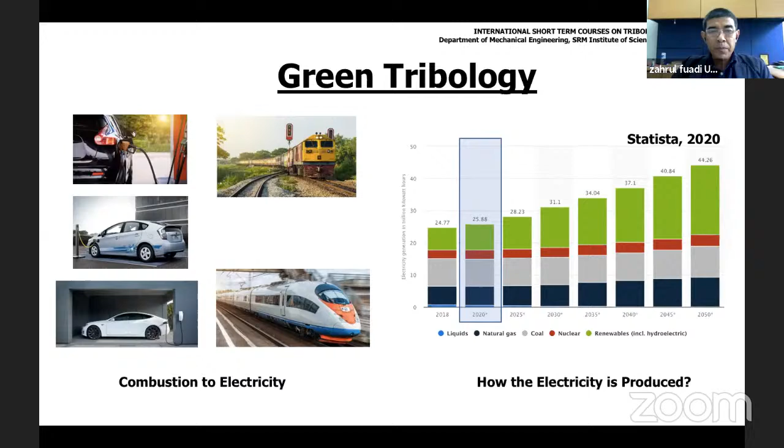So what is green tribology actually? According to Nosonovsky and Bhushan, tribological research to improve energy efficiency should achieve first, reduction of material and energy loss due to wear, reduction in energy loss due to friction, low wear, low friction, and extending the material life.

Another goal is to reduce or eliminate lubricants by proper selection of low friction mating surfaces, and in this case we should modify the surface. If you see this equation here, taken from Hutchings' book, the coefficient of friction is shear force divided by hardness. So if you want to reduce friction, you need to reduce the shear force, which means you use lubricants, or you can use harder mating surfaces by increasing the hardness.

For example, you use coating, you modify the surface, but you don't know which one will work. But we find out that friction reduction is caused by the combination of lubrication and surface modification.

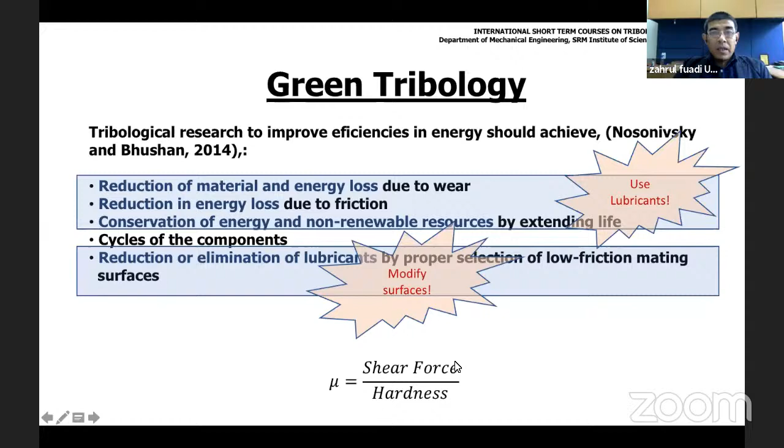Now let's go to some works to achieve green tribology. I heard a talk before about the polymer brush, which is called surface modification, or using lubricants. So lubricant is used to achieve some surface modification.

So in order to have low friction or low wear, lubricants are used. Why are lubricants very successful? It is because of the additives. We have seen many additives, and ZDDP is very successful, and molybdenum friction modifier is also successful. Now we will see that polymer friction modifier and nanoparticles will be used for future additives.

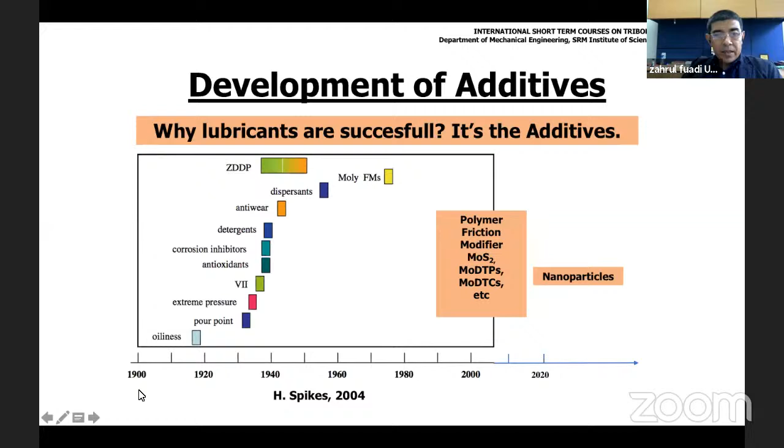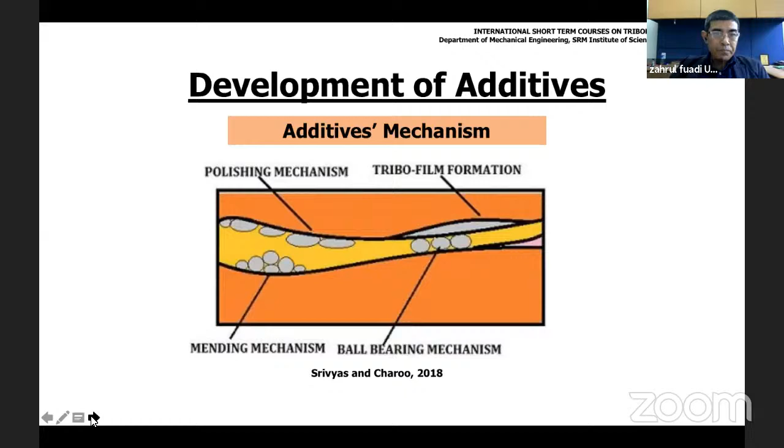This is what people have found out, that with ZDDP, a tribofilm is formed in the contact interface. And with molybdenum, also a tribofilm or tribolayer of molybdenum is formed. And this is how the mechanism works.

This tribolayer, which is formed on the contact interface with the presence of additive, forms a contact tribofilm which has low shear force, making it easy for the two surfaces to slide against each other, resulting in low friction and wear.

Now we should think about what is the carbon-based tribofilm. By using additive, it works by forming some tribofilm, and the tribofilm has low shear stress among them, so it makes the surface slide easily and results in low wear and friction. This kind of principle can be achieved by using...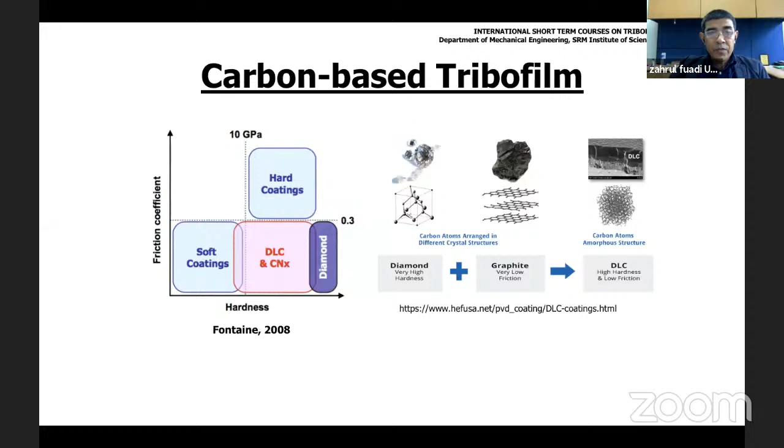By using additive, we can have tribofilm, which is sometimes in the structure of carbon base, but the carbon-based tribofilm we can also produce on the surface before the friction.

This structure of carbon has a lamellar structure like this, so it has a low van der Waals binding force, so it easily slides among each other.

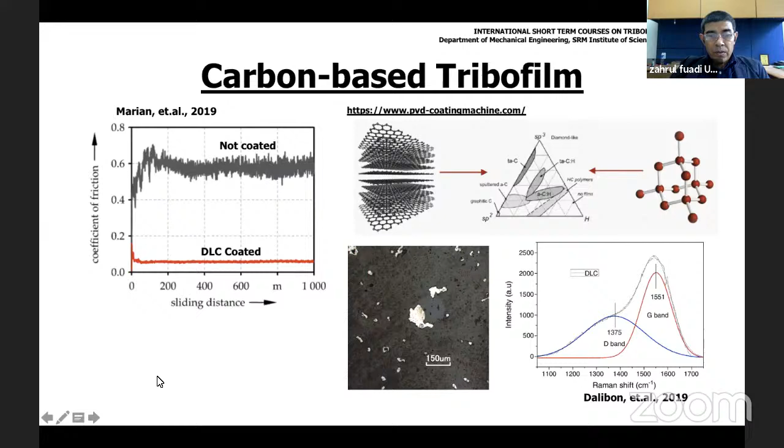In order to find out or study the structure of the coating, we can use Raman spectroscopy. Such coating is shown by 2 peaks here, 1 in the D band and 1 in the G band. So this kind of carbon-based tribofilm we can use to coat the surface to have low friction and wear.

This carbon tribofilm can be deposited or produced on the contact interface by 3 methods. The first one is by physical vapor or chemical vapor deposition.

We can do some deposition in the chamber, and then we apply it to the surface. We see here sometimes after the friction test, the coating is still there on the contact interface, but sometimes it wears out, but produces some tribofilm here.

Like in this one, it has worn out, but it has produced a tribofilm. Here, the most important thing is not the coating itself, but the transfer film, because the coating is going to disappear as friction goes on. But the transfer film it produces will keep forming and forming again, and it will help. If we can produce such structure, it will result in low friction and wear.

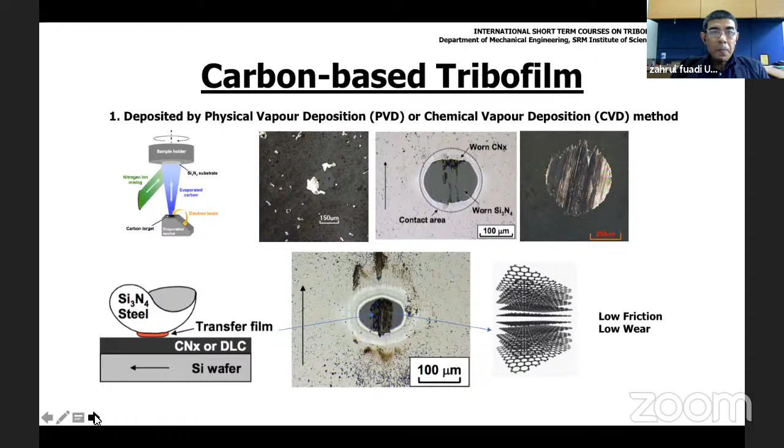The second one is such tribofilm can be formed on the contact interface by in situ tribochemical process. This example shows that the contact interface is not coated by any coating, only using the base oil or formulated oil with some additive.

But here we can see that after some friction, some carbon-based tribofilm has been formed on the contact interface. This is shown by this graph, which has peaks in D band and G band. So it can be formed on the contact interface by in situ tribochemical process without coating.

This also shows that by using bio oil, here we use palm methyl ester, which is derived from crude palm oil, that after friction, we can find some peaks on the D band, which shows carbon-based tribofilm. This carbon-based tribofilm was formed on the solid surface as a result of carbon decomposition from the palm methyl ester assisted by tribochemical process.

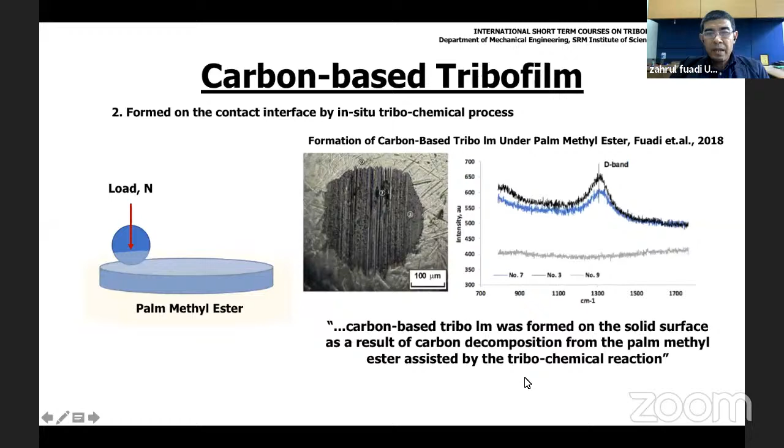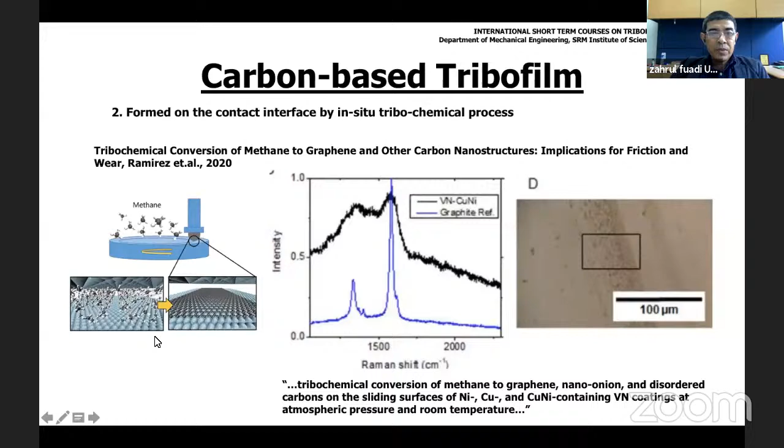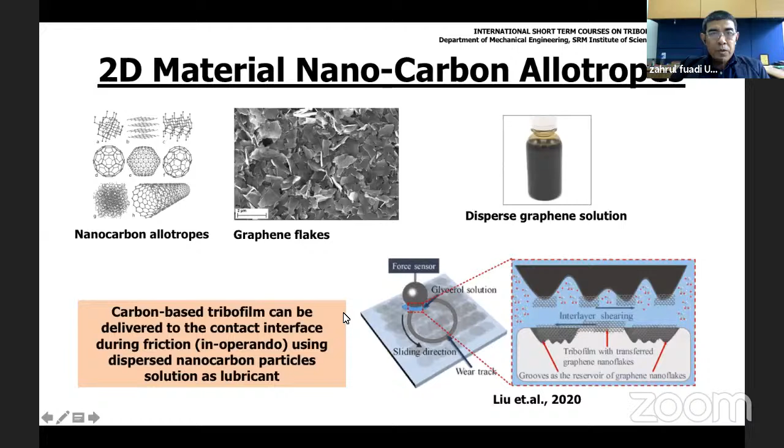And this carbon tribofilm can be delivered to the surface during the friction, or in operando, using dispersed nanocarbon particle solution as lubricant. So such tribofilm is actually not deposited on the surface, but delivered to the surface using some solution as lubricant. And I will show you some examples.

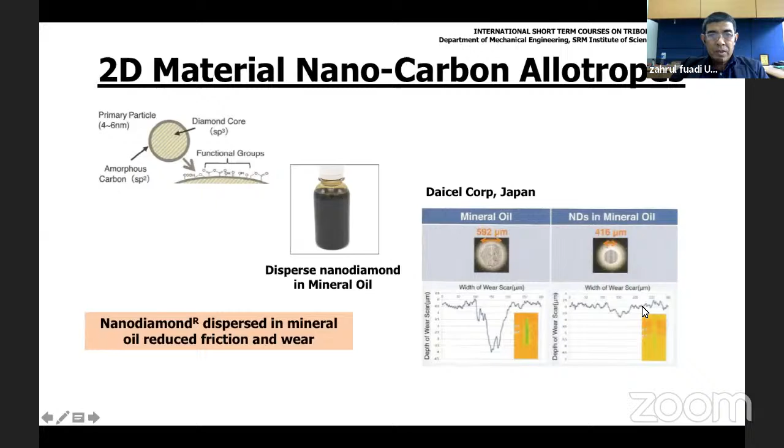And then the green lubrication. What is the green lubrication? It is to achieve a desired behavior of contact interface using material science and technology with minimum impact on the environment. Why do I say desired behavior of contact interface? Because most of the time, we want to reduce the friction, like for the elements or components in a machine or engine.

But what about the shoes? Are you going to reduce the friction of your shoes? I don't think so. What about your tire, the car tire? Do you want to reduce the friction of your car tire with the road? I don't think so. But in the case of friction and wear, if you want to reduce it, it will involve the process of selecting the lubricants and additives that are safe for the environment and biology.

And this can be achieved by using nanocarbon allotropes, which are two-dimensional nanoparticle additives. The mechanism is that the two-dimensional nanoparticle will be delivered to the contact interface during the friction, and it will produce lamellar tribofilms on the contact surface with low binding energy, which results in low friction and wear. And this has at least two requirements. You will need a fluid which has good solubility or dispersion stability for the graphene or the 2D material.

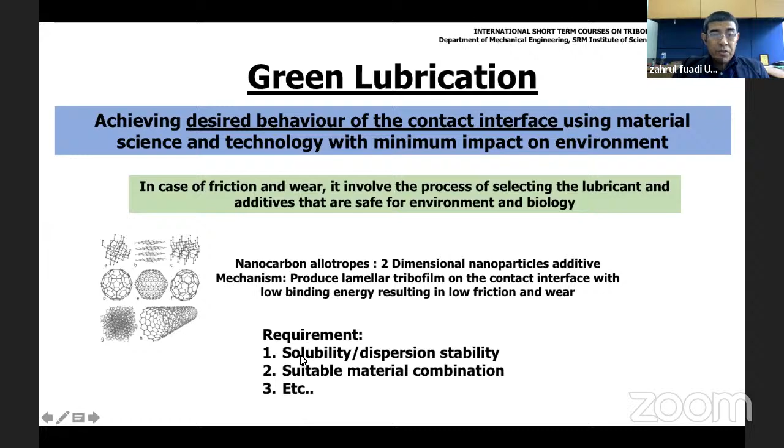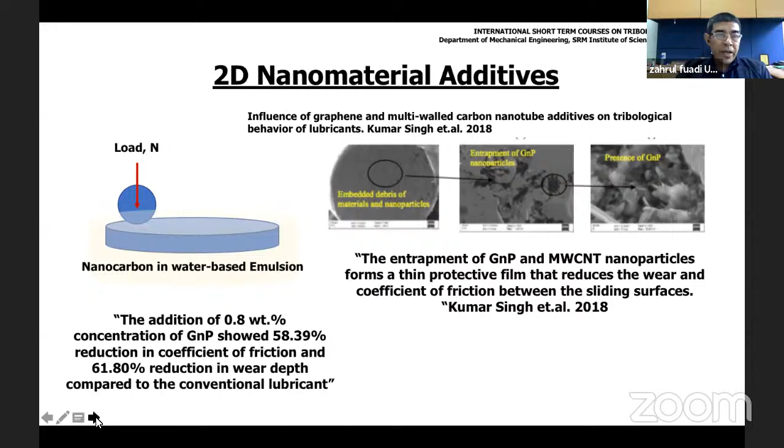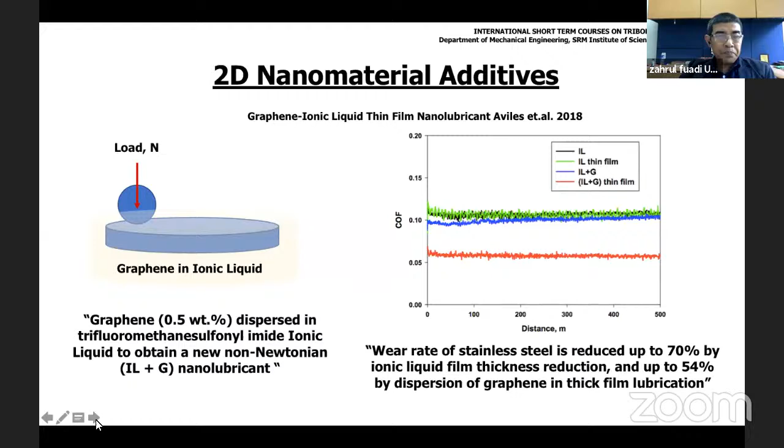And in this one, it is shown that graphene is dispersed in ionic liquid. These researchers use this ionic liquid and achieve lower friction compared to the ionic liquid that has no graphene dispersed. And here, the wear rate of stainless steel can be reduced up to 70% by the ionic liquid film, and then 54% by dispersion of graphene in the lubricant. So, what is the challenge for the future?

You have to find a correct form and type of treatment for the nanoparticle. For example, whether it's a flake type or nanotubes, you need to do some treatment using a solution to increase the solubility or stability, by using some surfactant, and then find a liquid for the solution. This liquid needs to be environment friendly, like ionic liquid, ethanol, or bio oil. Why not use water? Because the idea is to transfer the 2D nanoparticle to the contact interface. So the solution can be anything if it has good solubility and stability.

Then you need to find the correct friction material combination, because a liquid like bio oil has a large amount of oxygen and it will cause corrosion to the material. So in order to find the combination for green lubricants, it is actually about material selection.

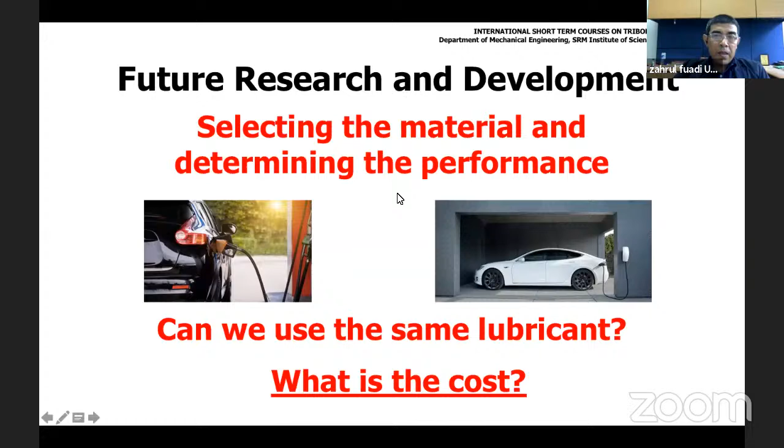Okay, maybe I have finished this talk a little bit early, but I think we should have more time for discussion later.

I'd like to give some concluding remarks here: green lubrication can be achieved by lubricants using two-dimensional material and environmentally friendly fluid. Research and development are required to find the correct material combination, and this is the job of us as researchers. The cheap and mass production of two-dimensional material is necessary for cost benefit.

The next point is that green lubrication has to be supported by regulation or policy. This is because green lubricant is expensive, so if you don't have regulation, nobody is going to use it, because everybody will ask whether it is costly or cheap. So it needs to be supported by regulation.

So for us researchers, what we have to do is to try, try, and try. And I would like to end this session with one quote: environmental conservation is expensive. If you use a cheap way to get things done now, it means that someone in the future will have to pay the price balance. So I think this concludes my talk.

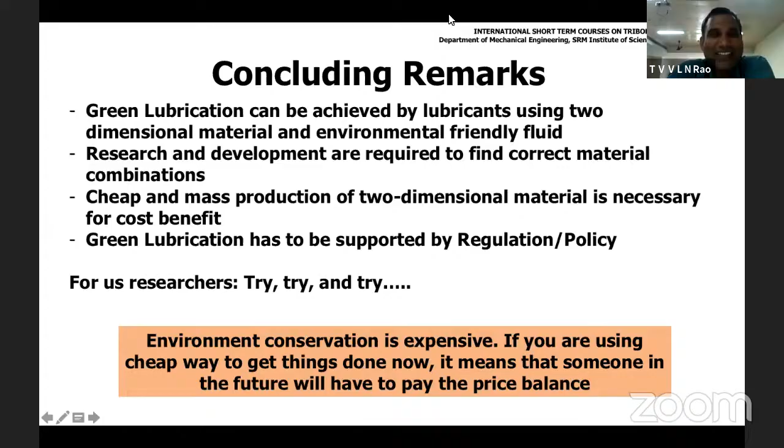Thank you very much, sir. I would like to give this back to Dr. Katiyar from SRM. Yeah, sir, thank you very much. Are you hearing me? Yes, very nice and clear. Thank you, sir. This is Dr. Jitin Katiyar, sir, I'm a colleague of Dr. Rao. Okay, thank you.

Actually sir, one question came, I don't know the name, Del PC is written: Is there a role of crystal structure of carbon-based additives on the tribological performance of lubricant?

Right, let me read the question. Actually, what we achieve by adding additives in lubricant is to produce some tribofilms on the contact interface. This tribofilm, which gives low friction and wear, always shows that they have some crystalline structure. They have sp2 and sp3 peaks, meaning they are in carbon structure, so this slides. They have low van der Waals binding energy, so it slides very easily among each other. I think so.